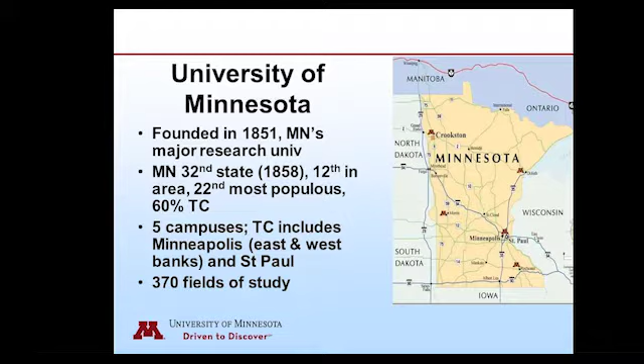The college is somewhat unique for a major research university in that we have mathematics, physical sciences, and engineering together. We think that's a huge advantage with interdisciplinary work, collaboration that takes place, we'd like to say, seamlessly.

In terms of the department, we have a diverse faculty. I brag that half of our faculty have one of their degrees from an international institution from outside the United States. We're a little heavy on the professor side, but we have 8 outstanding assistant professors doing very exciting work.

Being at a major research university, research is a very important function of the department, along with teaching and outreach service. Our department is civil, environmental, and geoengineering. We have 3 undergraduate degree programs within the department, as our name implies. Environmental is somewhat new, although environmental research and teaching has been a very active component from the start. Geoengineering has a long history dating back to the School of Mines that was at the University of Minnesota.

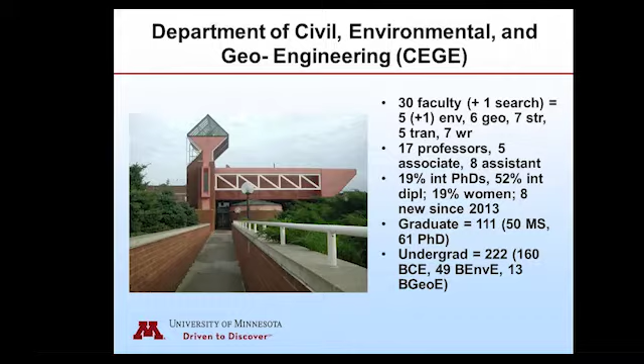I am very fond of our building. It is underground, 7 stories underground, and I'm very proud of our laboratories. I'm a lab guy, and you see one of our outstanding facilities here, the MAST Lab. We also have the Galambos Structural Engineering Laboratory that makes up the core of our building, that central area here.

This is a cross-section of our building where the first 3 floors are an open cut. 2 shafts were driven and a mine space was created to form the 6th and 7th floors. Going through the labs, the so-called WAVES lab features a laser Doppler vibrometer where we can measure displacements at the sub-micron level. The rock mechanics lab, where I live, houses 8 MTS load frames. We have a long cooperation with MTS in utilizing closed-loop servohydraulic testing for looking at how brittle materials behave beyond the peak load, and these other labs.

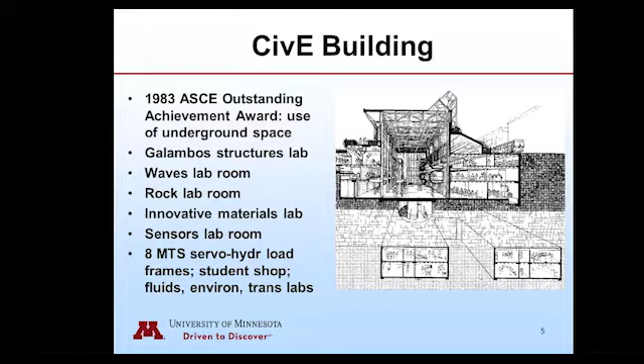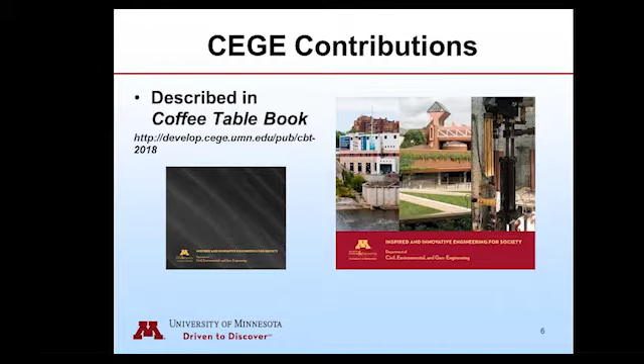One last thing about the department, if you have time, visit our website. We put together a collection of contributions from faculty and students in the form of what we call a coffee table book, and it is available online to view. Certainly one of the features of this book is the MAST Laboratory.

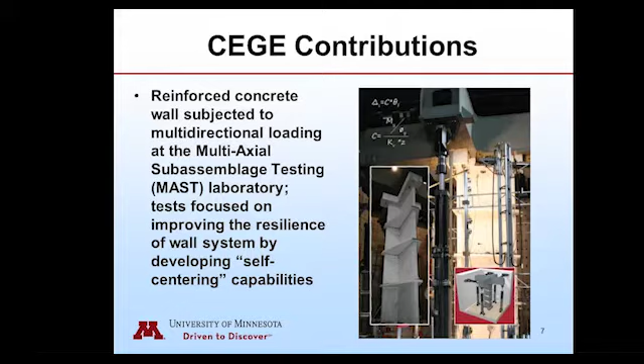The MAST Laboratory was developed as part of the National Science Foundation program on the Network for Earthquake Engineering Simulation. This program went on for 15 years, and the MAST Lab was very active over those years. The program has since ended, or sunset as NSF calls it, but the lab still continues, and we're trying to expand the ways we can use it.

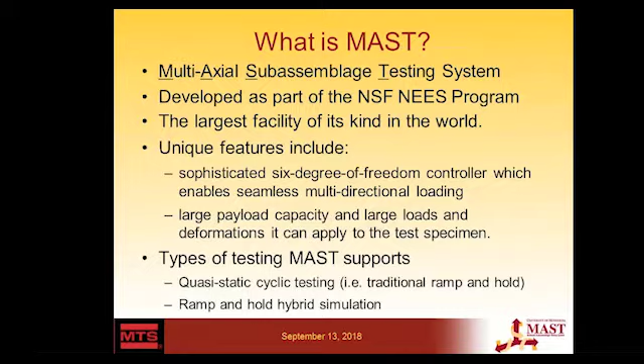It is the largest facility of its kind in the world, which is to a great extent a credit to MTS for helping us realize the vision for the MAST Laboratory. It features a 6-degree-of-freedom controller that allows seamless multi-directional loading, essential for what we wanted to do, along with a very large payload capacity and very large force and displacement capacities for testing. The MAST Laboratory was initially envisioned for quasi-static cyclic testing, common in earthquake engineering, but also with the hope of expanding functionality to ramp-and-hold hybrid testing, the subject of this workshop.

Let's talk briefly about quasi-static cyclic testing. The advantages are that you can test real structural elements as opposed to material samples, and you can observe failure as it evolves, gaining insight into specimen behavior. But it does have limitations.

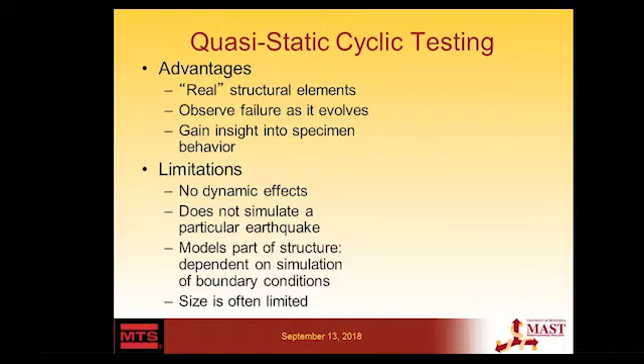You can't simulate dynamic effects, and you can't simulate a particular type of hazard—if it's a seismic hazard, that would be a specific earthquake. If the specimen is part of a larger structure, you've separated it from that structure and violated its boundary conditions, replacing them with idealizations that may not be very good. Quite often the size of the specimen is also limited.

Hybrid simulation, in different phases or forms, has been around for some time. The idea is to begin with the excitation or input loading for the hazard—if it's an earthquake hazard, that would be a ground motion. Instead of going directly to a test specimen, you use that ground motion to load a virtual model of a structural system in its entirety. This could be the entire structure, the structure and foundation, or the structure, foundation, and soils over a larger area.

You calculate an increment in displacements at the degrees of freedom of interest, then impose those displacements on a physical test specimen representing a portion of the structure. To do this, you have to load all the ends of the specimen where it's been virtually removed from the structural system—in other words, apply the forces at the boundaries. Then you measure the restoring force and displacement feedback, which goes back into your structural model to update it, the finite element model, and then you recalculate the next increment in loading.

There are some limitations to the system. It's sensitive to small experimental and numerical errors, and so far it's been limited to lumped mass systems. If you're not doing real-time hybrid simulation, you also have problems with creep and relaxation—if you load and then hold, most materials will creep. In addition, you won't get the dynamic effects from inertial loading. That's why real-time, or fast, hybrid simulation has become very popular for earthquake engineering and other loading regimes.

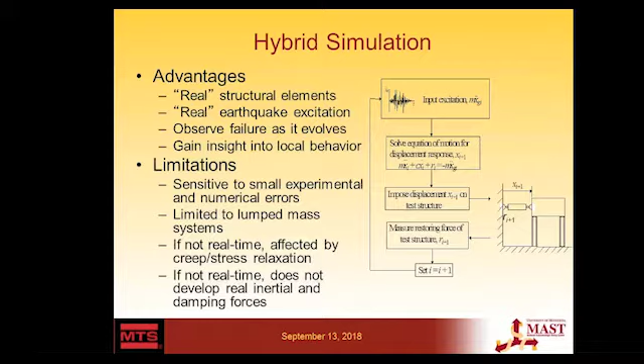Here in the MAST Laboratory, I won't fool you—we can only do slow hybrid simulation. In other words, the loading has to be applied slowly, for a number of reasons having to do with how the system was built. However, it does give us the opportunity to address some of the other problems.

Some of the things we can address include loading in multiple directions, handling forces at boundary conditions where a structural member is removed from the larger system, implementing gravity loading and vertical loading if it's not constant, bracing the specimen so it doesn't become unstable during testing, and addressing size effects by going to full scale or near full scale. We can't, of course, address the dynamic effects.

So what is the MAST? The MAST is a series of components—physical components that you see out here, as well as a controller. The physical components include a very large crosshead and a series of actuators.

There are 4 horizontal actuators, 2 in each horizontal direction, each with 440 kips of load capacity and plus or minus 16 inches of stroke. They have U-joint swivels that can move plus or minus 25 degrees. We also have 4 vertical actuators that support the crosshead, each rated at 330,000 pounds with a stroke of plus or minus 20 inches.

Instead of having U-joint swivels, they have hydrostatic bearings, which you can see here. You can see part of it. It's the shiny ball at the top and bottom of each of the actuators.

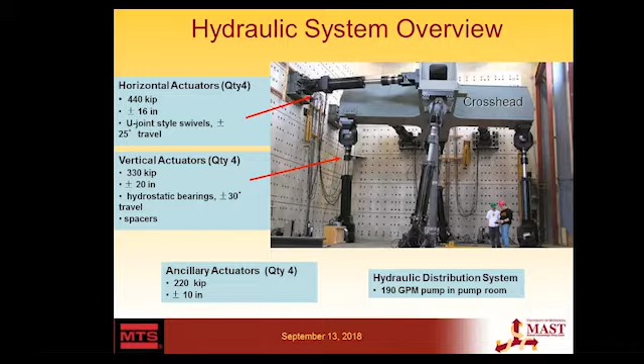Everything is powered by a 190 gallon per minute pump.

The concept behind this 6 degree of freedom testing system is that we subdivide space into 3 orthogonal directions, X, Y, and Z, where X and Y are the 2 horizontal directions. I'll refer to one as lateral, the other one is longitudinal, and then the vertical is Z.

We control motion or forces in 3 translations along those axes and 3 rotations along those axes, and that's where the 6 degrees of freedom come from.

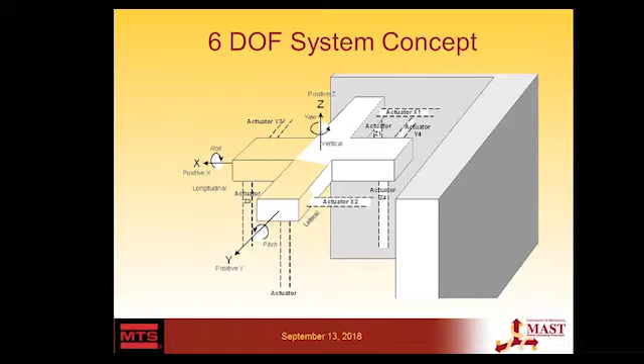The crosshead acts as a plane, as a rigid plane. So if you control the position of one point on the actuator, then you can define any other point in that plane. The motion of the actuator is relative to the reaction floor and the reaction walls.

So the crosshead is, as you can see, a very large item, roughly 29 feet end to end. It's a steel box section with internal stiffeners, very large dimensions, 56 inches by 65, and very thick plates, 1.5-inch plates, except for the bottom plate, which is 2 inches thick.

It weighs almost 100 kips. All of this was done because we wanted a very stiff member so that it could actually act as a rigid plane under full load, and there's a number of different configurations of actuator loads that we considered. It deflects less than 0.1 inches from one end to the other.

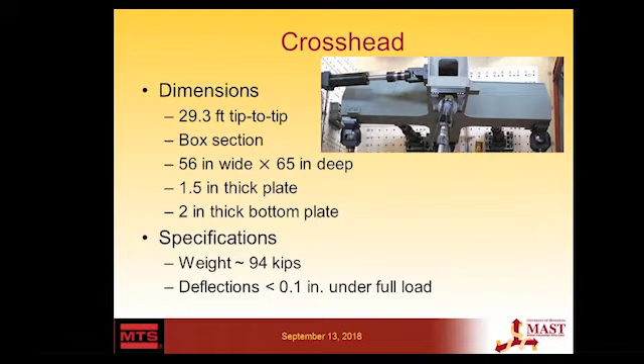The other component, besides the actuators and the crosshead, is the floor in combination with the walls. The floor was also designed to be very stiff under full loading, plus or minus 1/10 of an inch.

The floor is 7.5 feet of concrete that's supported on 32 piles that are driven down to bedrock. It is topped with a steel plate of 5.5-inch thickness, and it has a 35-foot by 35-foot plan dimension. The concrete is post-tensioned in both directions to make it extremely stiff.

And there's, in the steel plate, a regular grid of holes that have been drilled and tapped at 18 inches on center. The purpose of the steel plate is to give us a strong, hard bearing surface and also to provide the opportunity to have these drilled and tapped holes so that we can connect directly to the floor instead...

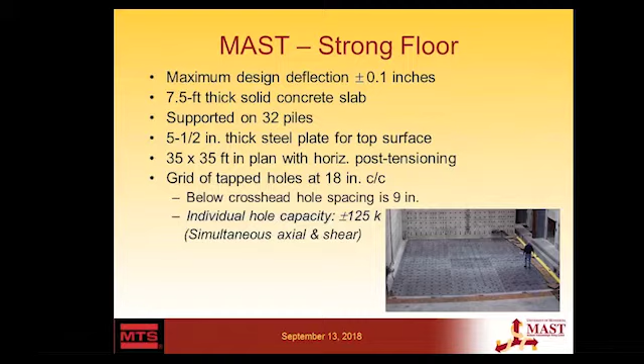of having to go down to a layer or a level below the floor like in a traditional lab. Each hole has a capacity of about 125 kips in simultaneous axial loading and shear.

The strong walls are L-shaped configuration. They're post-tensioned to the foundation and they're post-tensioned to each other. They're 35-foot by 35-foot and 7 feet thick.

They also have a series of holes. These are through holes with a 125 kip capacity, simultaneous axial loading and shear.

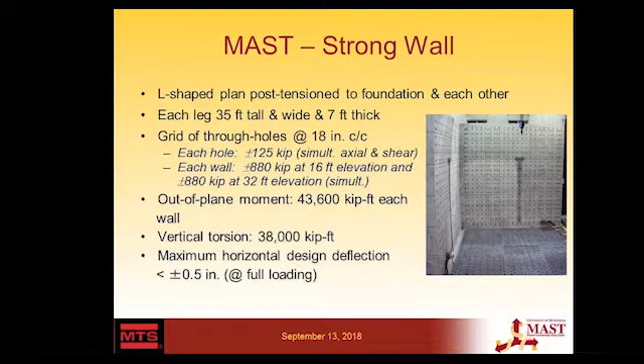And it was designed so that we could apply the maximum load from the horizontal actuators acting simultaneously. That's like 880 kips at either 16 feet or 32 feet in elevation along the wall. So we have very large out-of-plane moment capacity, very large torsional capacity, and also very stiff.

The other component of the MAST is what you don't see here, the controller. The controller is a 6-degree of freedom controller that is housed in a computer in the control room that you see there.

Let me see if I can get this video going. No, apparently not.

But we can control each of the degrees of freedom separately to give us a very wide range of possible motions of the crosshead, therefore possible boundary forces or boundary deformations.

The individual degrees of freedom, the mode of control, can be switched. It can be switched while the specimen is under load. We can slave one degree of freedom to another, and we can have linear combinations of degrees of freedom.

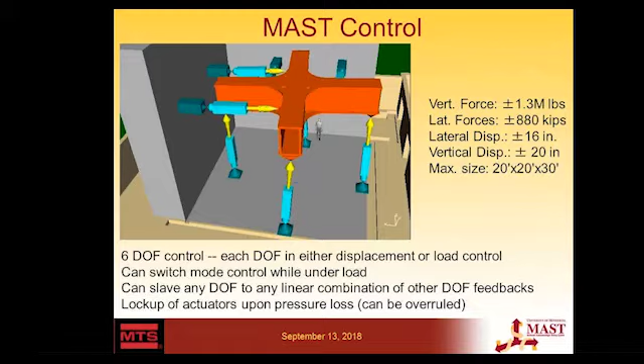So here's a list of some of the features of the controller. I mentioned several of them. In fact, I've probably mentioned all the ones I want to mention here.

Here's an example of how we can use the MAST controller for structural testing. Imagine you had a wall and you wanted to load the wall with a displacement that's applied in the plane of the wall. So the lateral degree of freedom in the x direction you would control in displacement, and it would be an input command either from a file or done interactively. That's the displacement that you would like to see, or the increment in displacement.

In the other horizontal direction, we don't want any loading, so we control in either displacement or force and set that to 0, depending on which of these you prefer. In the vertical direction, we would control it in force if we wanted a constant vertical force or a varying vertical force. And then we have the 3 rotations.

The rotation out of plane would be set to 0, either in displacement or force. The rotation in plane would be slaved to the lateral force, because generally, at least under earthquake or wind loading, the moment at the top of the structure is going to be a function of the horizontal force at the top of the structure. And so you apply a displacement at the top, you get a feedback force, and you use that force to calculate the moment input signal.

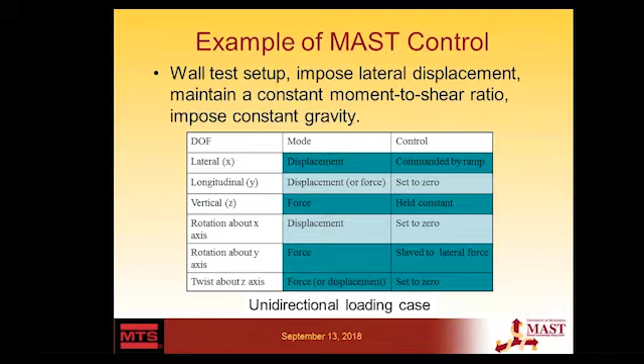Some past projects that may be of interest to you.

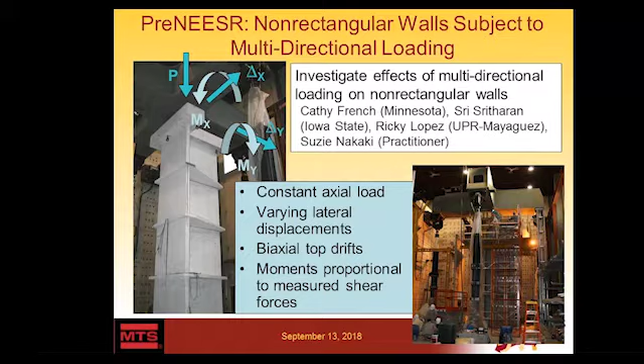A second project of interest here is a project that involved my colleague Carol Shield, who's also was the director of the MAST Laboratory during the NEES years. She worked with Gustavo Parra of the University of Wisconsin, previously the University of Michigan, and Jerry Lynch from Michigan.

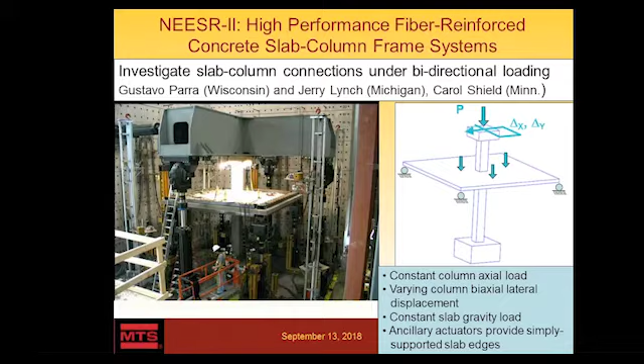They were looking at a flat plate structural system under seismic loading. Of interest here is that they applied biaxial loading history, biaxial displacement history at the top of the specimen, a constant gravity load, but they used the ancillary actuators as supports on the four corners of the slab. The edges of the slab actually represented midpoints of the slab structural system, and then they had ballast loading to simulate gravity load on the slab.

Another project involved Jack Moehle from Berkeley, Julio Ramirez from Purdue, and Adolfo Matamoros from University of Texas, San Antonio. He was at Kansas at the time of this test. They wanted to simulate constant axial load, varying lateral displacement, but they used the crosshead to provide a fixed condition at the top of the structure. So they simply set the rotation to 0 in both directions to simulate that fixed condition.

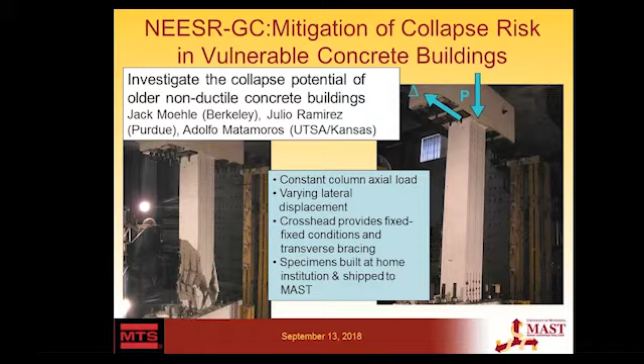Additionally, they built their specimens at the home institution and just shipped them here. That makes for a much more efficient way of running the mast since you don't have to build on site.

Another test of interest was run by Rigoberto Burgueño of Michigan State University and Eric Hines at Tufts. They were looking at structural systems that involve open box concrete structures. These concrete structures are made from concrete panels. They wanted a constant column axial load, but they also wanted a constant moment to shear ratio and a varying lateral displacement in one direction.

So, as you can see in the picture, they would apply a displacement at the top of the structure, measure the feedback force, and use that feedback force to calculate the moment such that the moment to shear ratio remained constant during the test.

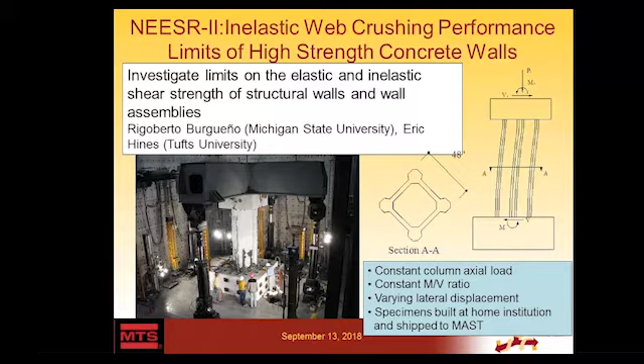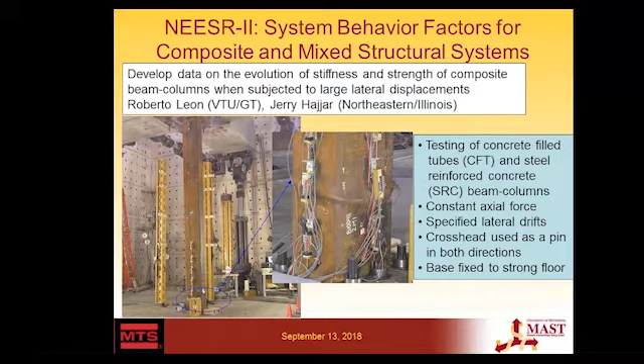Another interesting test was a project run by Roberto Leon of Virginia Tech University and Jerry Hajjar at Northeastern. They wanted to test concrete-filled tubes and steel-reinforced concrete beam columns under constant axial load and lateral displacement, but they used the crosshead at the top to simulate a pin condition so that the moment was set to 0, so you ended up with a pin at the top.

The last test I'll mention here is actually a larger specimen. It's a 2-story, 1 bay by 1 bay steel frame. This project was conducted by Charles Roeder and Dawn Lehman at the University of Washington, and Taichiro Okazaki used to be here at the University of Minnesota and is now at Hokkaido University in Japan. They wanted to test this steel frame with 2 different types of bracing systems, so they actually tested it twice. They applied a constant vertical force with a crosshead, 0 top moments by setting the moment input to 0, and specified biaxial drift.

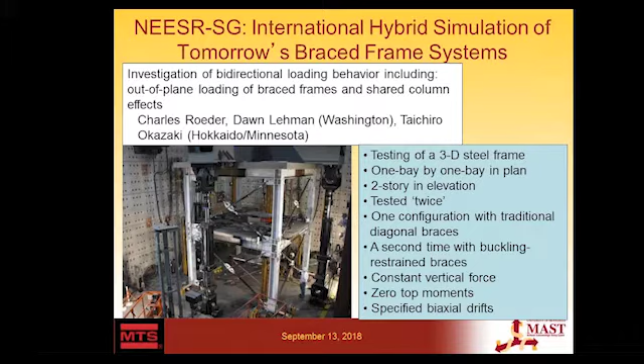What's of interest here isn't necessarily the loading protocol, but that they actually built the structure. The erection of the structure was done using the crosshead as construction equipment, avoiding having to use cranes.

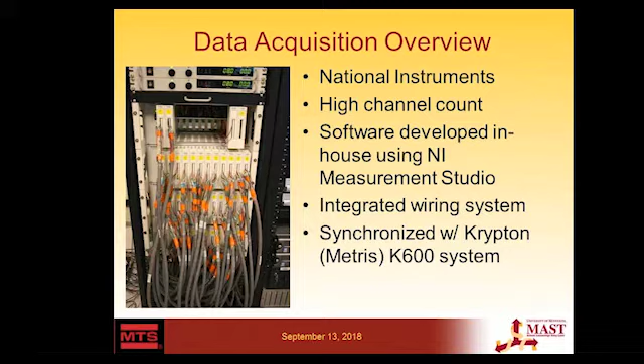Okay, very quickly going through some additional features of interest. We have a data acquisition system. It's a National Instruments data acquisition system, fully integrated in the laboratory, and it's also synchronized with our LED positioning system. It's 16-bit, with 176 voltage channels and 256 strain channels.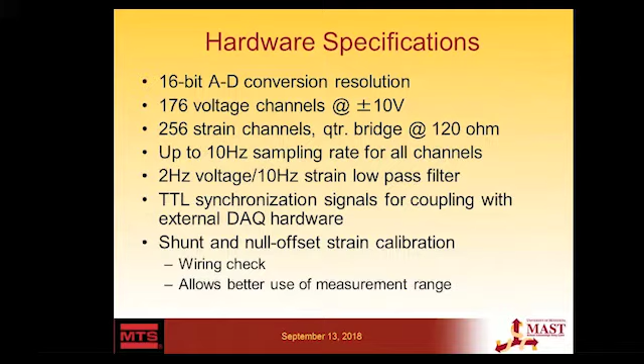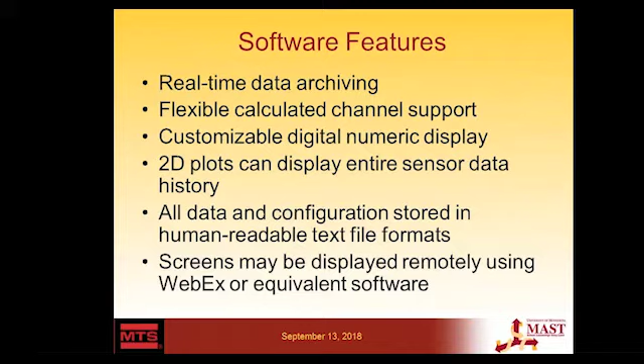We have features in the software that make it quite easy to work with: real-time data archiving, customizable digital display, so what you see during the test can be whatever you want, also customizable 2D plots, and all data stored in readable text files. We can also share screens remotely using WebEx or something similar.

We also have a variety of instrumentation, you know what that is: LVDTs, string potentiometers, tilt meters, load cells. We have a calibration stand.

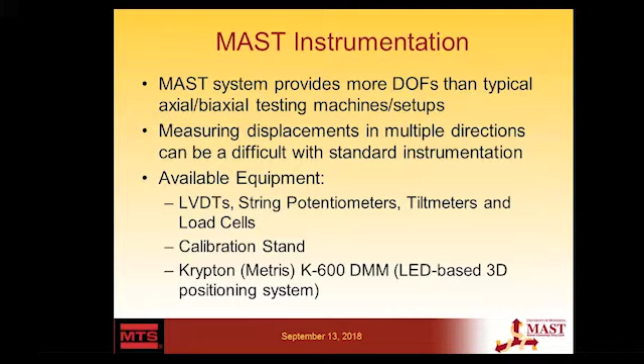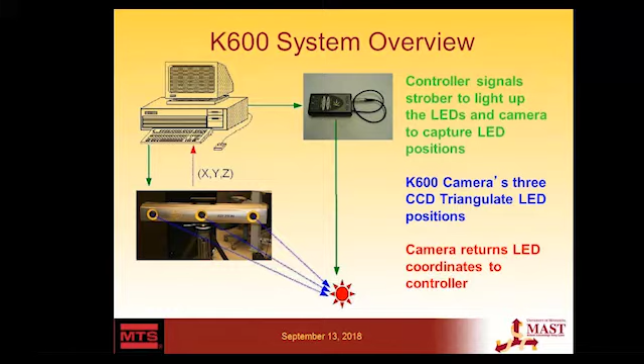We also have this LED-based 3D positioning system, the Krypton K-600. That's a very valuable piece of equipment. It consists of a unit that has 3 cameras. You use LED targets, placing them on the structure at different locations. You run the strobe so the LEDs emit a signal that the camera picks up. Since you have 3 cameras, you can use triangulation to determine the position, and this is stored in the computer. You can use this to determine position, but you can also use it to determine unit strains on a structure.

Another nice feature of the MAST laboratory is how the instrumentation plan was set up. From the instrument, we go directly to connection boxes available in the payload area. These connection boxes are connected with cables that go to trench cables around the lab floor. You can see the shaded area of the trenches, and then the cables in the trenches go directly to the data acquisition system housed in the control room where the controller is. That way we can keep the amount of cabling on the payload area to a minimum.

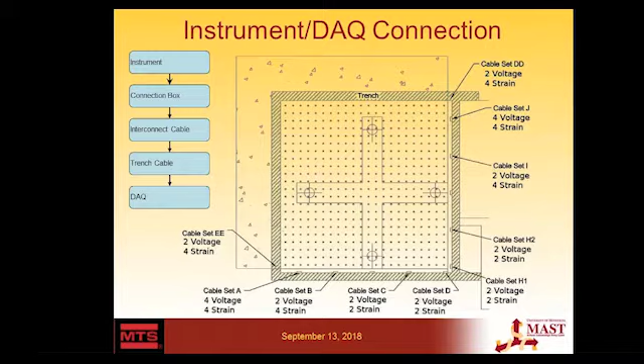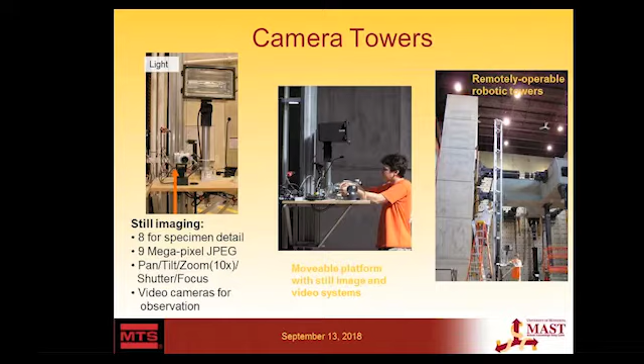We also have imaging equipment besides the Krypton. We have 4 towers with the equipment you see on the left. There's a light, a camera, and they're on a platform. The platform and cameras are computer controlled from the control room. The lights themselves you have to run manually.

So now I'd like to show some videos of past projects, assuming we're doing well on time.

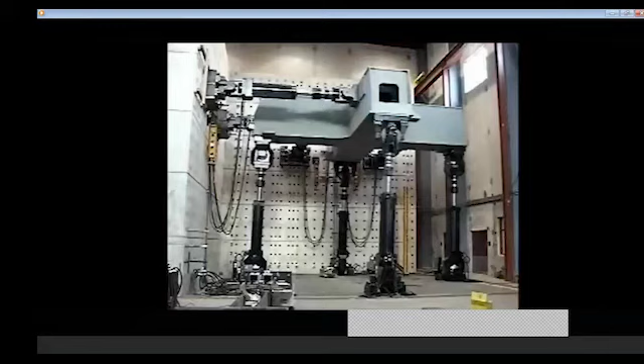So the first video is just a movement of the crosshead in different directions with the control system and with the actuators, to give you an idea of the range of movement. This is one of the things I wanted to show you earlier. You can see a lot better here, and you get essentially whatever movement you want.

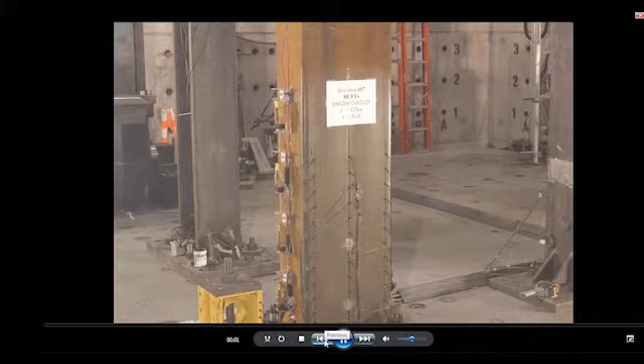Here we have an individual steel specimen - this is the concrete-filled tube - and you can see the range of motions it was going through. You can also see where the steel tube is buckling at the base of the specimen.

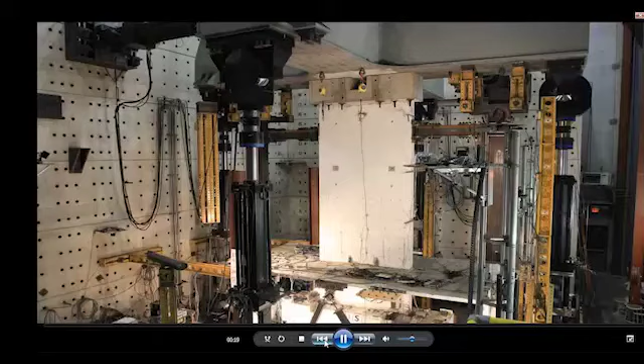Here you see a precast concrete shear wall. This is a project conducted by Sri Sritharan from Iowa State, who's going to be our speaker later on, and Kathy French. You can see the range of motion.

One of the things the MAST allows us to do is, besides very large forces, achieve very large drifts. For full-scale structural components or systems, it's been difficult in the past to push the system to drifts or displacements that characterize the full range of response of the system. So we may know what happens up to a certain point, but after that, you read research papers where researchers indicate they were out of stroke, that's as far as they could go with their equipment. Well, that's certainly not as common with equipment like this.

As you can see, we work very fast here. We run around the specimens.

Okay. How do I skip over?

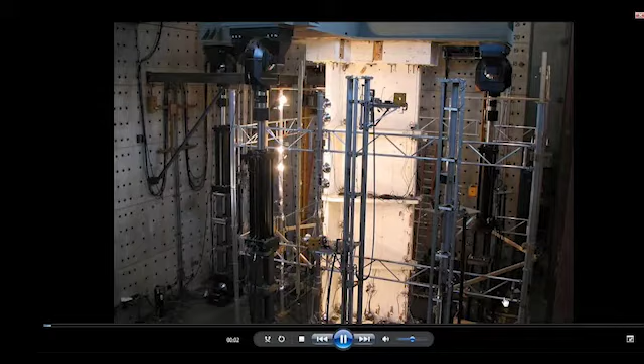Okay, this is the T-wall. This specimen was built in the MAST lab and then rolled into place into the payload area. Oh, you built it inside, okay.

For a specimen as large as this one, the lateral displacements at the top can be extremely large, and with traditional quasi-static loading equipment, it may be difficult to accommodate that. That was one of the goals we had when we designed this.

Now, all of these have been quasi-static tests, and I want you to think about the jump we would have to make to go from this to hybrid simulation. We have really most of the features that we need except for the control algorithms for hybrid simulation. We now have those in place thanks to our good friends at MTS, and they'll be talking more about that later on.

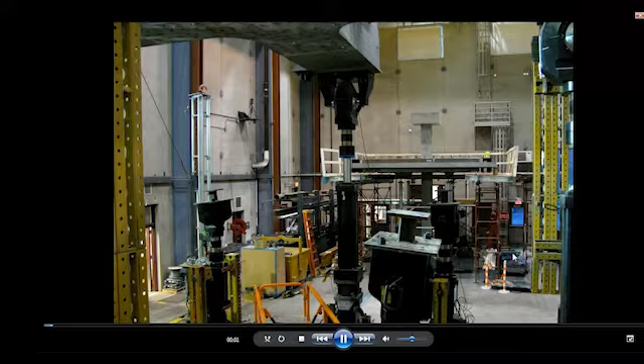This is the flat plate structure. You can see the construction going on. It was built in this end of the lab. This one was rolled into place.

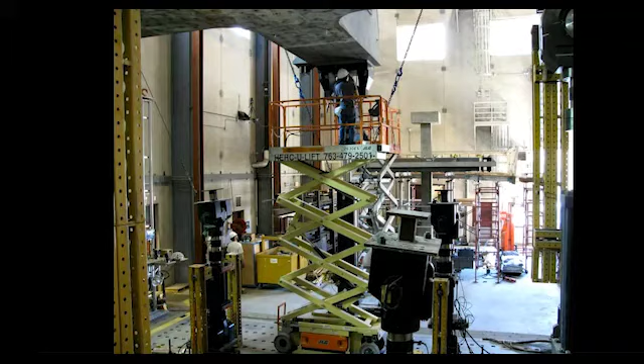To roll it into place, one of the actuators has to come down. It's the only unfortunate aspect, and it is a major operation. But once that is removed, then the specimen is rolled into place. The actuator is replaced.

And here you see the test.

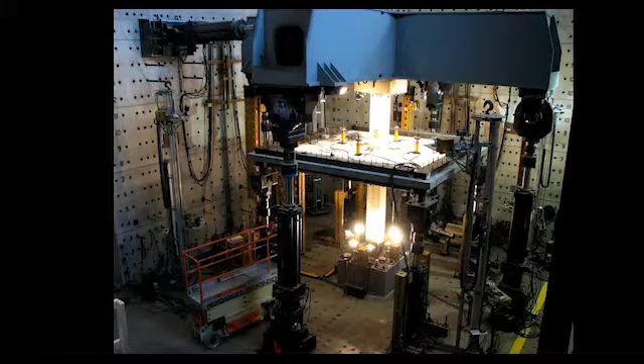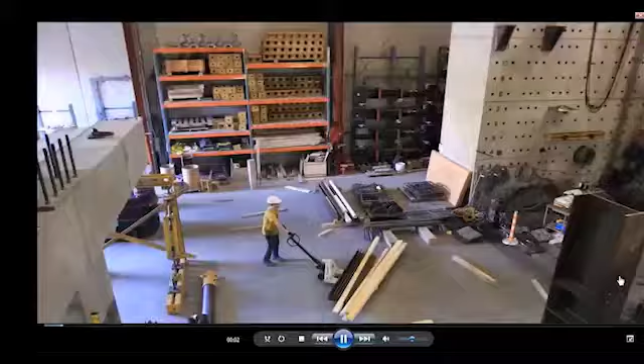Here's a specimen that was shipped to us, and some components were built here. As you can see, there's some base blocks, but building these smaller base blocks is a lot easier than building the whole thing here.

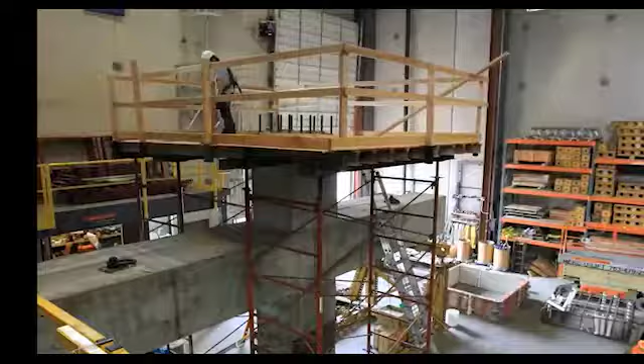Quite often we find that when we start one specimen, the construction and erection process can be improved, and we may make modifications for the next one.

Now, notice that top block, it's not square with the rest of the specimen. It's at a 45-degree angle. And the reason is that this specimen is very long. In order to get it into the payload area, it was actually placed diagonally.

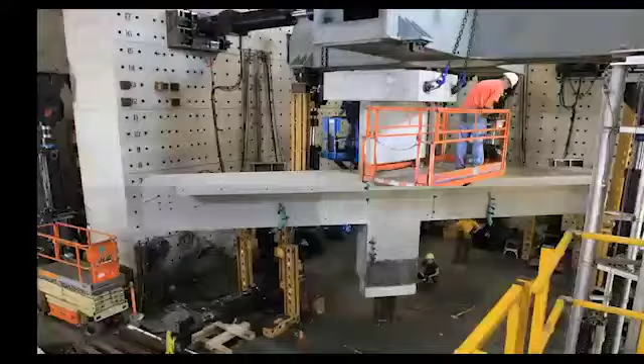That's possible because the controller for the MAST allows the user to define coordinate systems however they want, as long as it's orthogonal. The other nice feature is that you specify the command signals in terms of that coordinate system, and all of the projections onto the displaced current coordinate system are done internally by the controller.

And you can see that specimen has been placed diagonally so that it fits. Otherwise, it would have interfered with two of the vertical actuators.

Rather involved test, as you can see. You also notice that the specimen was actually picked up by the mast so that the bottom pin could be installed.

Quite often what dictates, to a great extent, how long it takes to test in the mast is not only the building process and erection of the specimen, but also the amount of instrumentation and when and how quickly it is installed.

So I'm going to move on.

It's another one of these. Sorry?

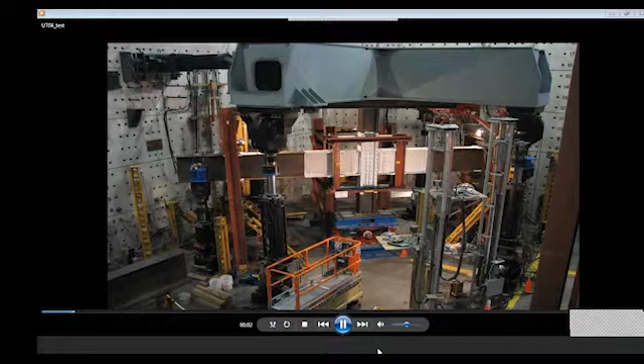This is a similar test setup, but it's with a steel beam column frame. This is the actual test. It was placed diagonally once again for the same reason, so that a longer specimen could fit in place.

And this gives you a great idea of the amount of displacement that can be imposed by the mast system.

This is a steel truss system, so-called staggered truss building system. Very flexible, so you can see, once again, what you can do with the mast with these very flexible large-scale or full-scale components.

This is a very large concrete column. The idea was to get an idea if the size has an impact on the performance, because it's about twice as big as most of the other column tests done previous to that. And also what happens when you push the specimen to very large displacements.

It also had an imaging system that was used. You can see the imaging system being placed at times to get an indication of how much damage there is at cross sections near the base.

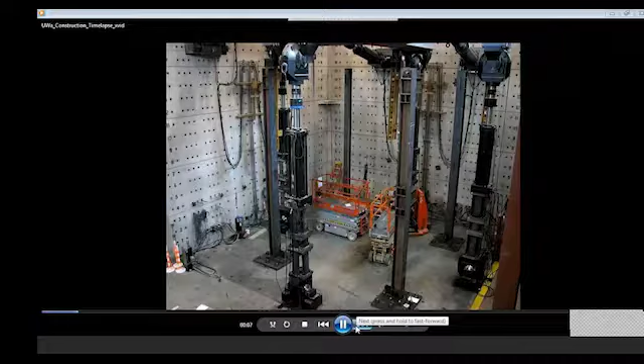Okay. This is the steel frame. Maybe we'll look at the erection that used the mast.

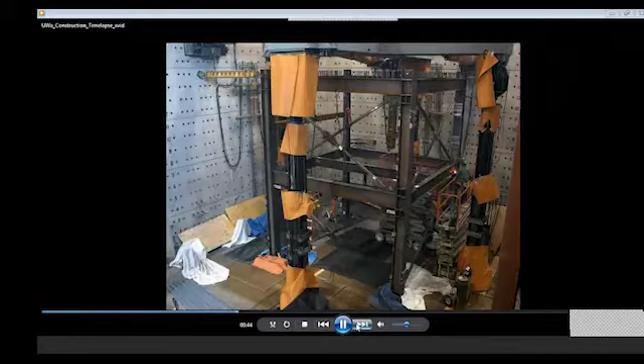This is the last one, Paul.

And this is the test of that system.

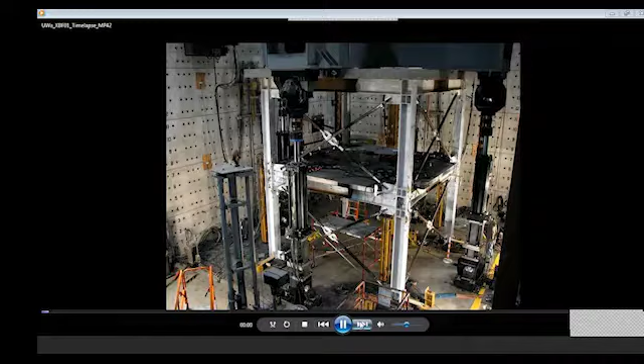This is the diagonal brace system with very flexible braces and very flexible gusset plates. You can see the amount of movement that the diagonals went through, but for design-type motions, it actually performed very well. Had the gusset plates been stiffer, then the performance wouldn't have been nearly as good.